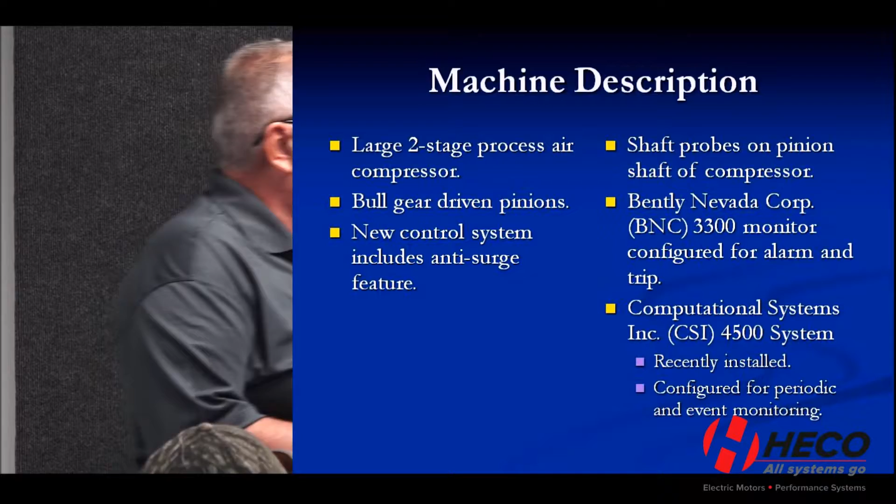They put a new control system on it, and that new control system had a feature that would stop the machine from being able to surge. A surge condition is when you're operating in a pressure and flow area where the machine is not designed to run, and it can cause some fairly violent vibration. What happens is you're trying to compress the air so much and there's no place for it to go that it relieves itself by coming back through. So you actually get a flow reversal through the wheels.

So it goes whoosh, whoosh, and you can hear it sometimes. If you let it go too long, that air doesn't go through the cooler, so it just gets warmer and warmer. The machines grow, clearances are taken up, and you end up destroying a machine. So they put an anti-surge on that says if it started to detect surge, it would automatically pop open a relief valve, let the flow continue through the machine, decreasing the discharge pressure with a pop-off valve.

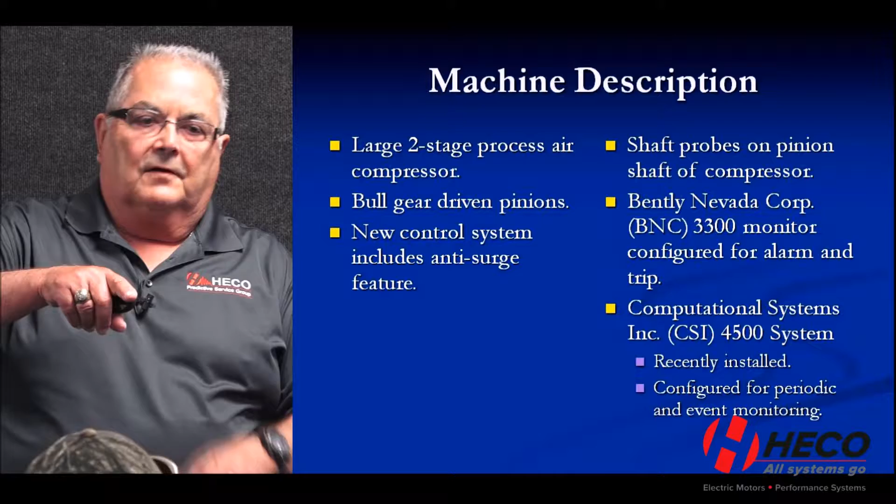They also put a Bently Nevada 3300 series vibration monitor on it, set up for alarm and trip. And piggybacking onto that was a CSI 4500 system, which took the outputs from the Bently system and recorded them. The Bently system is blind, it's a meter, it says vibration is going up, trip. This one recorded frequency spectrum, time waveform, trends, all of that. So it's piggybacked onto the Bently probes.

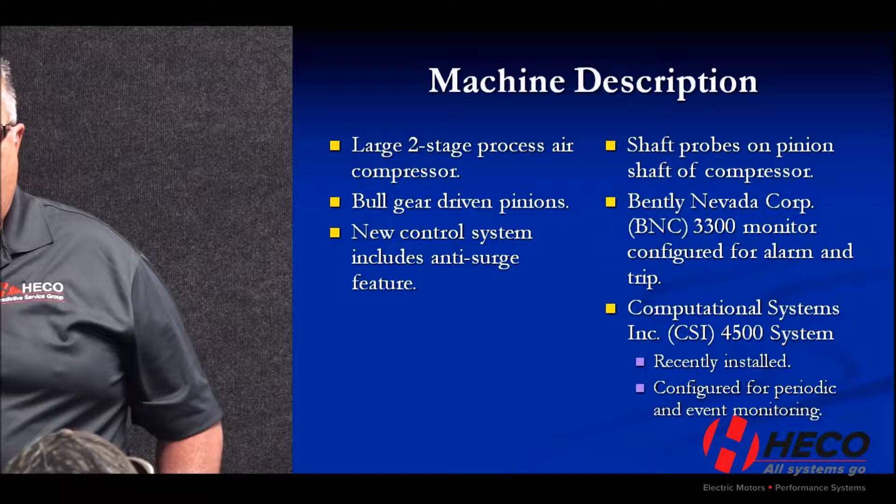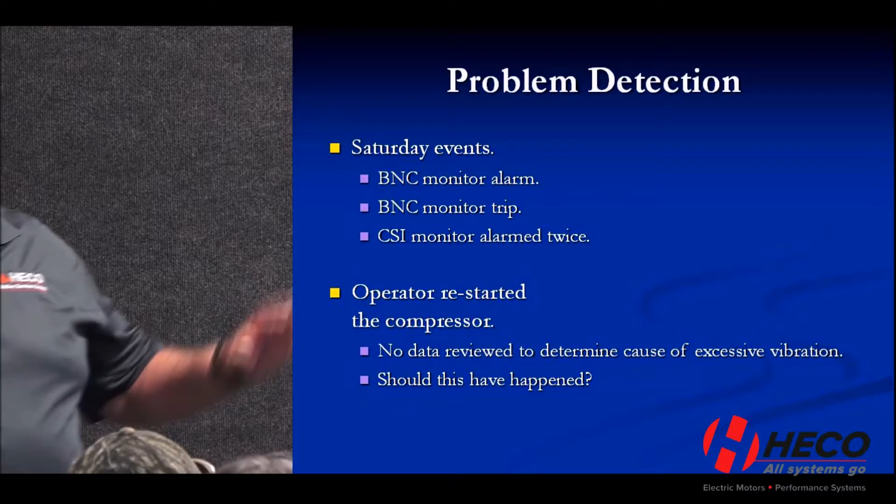Events. On Saturday, the Bently Nevada system alarmed. They have a low alarm and a high alarm. It hit the alarm, then went up and hit the trip. The CSI monitor alarmed also. The operator said, well, it's Saturday, I don't want to call anybody, so he just restarted the machine without reviewing data. Not a good practice. If you have these protection systems and you have a trip, somebody should be looking at it. Otherwise, you collected all this data and it doesn't do anything for you.

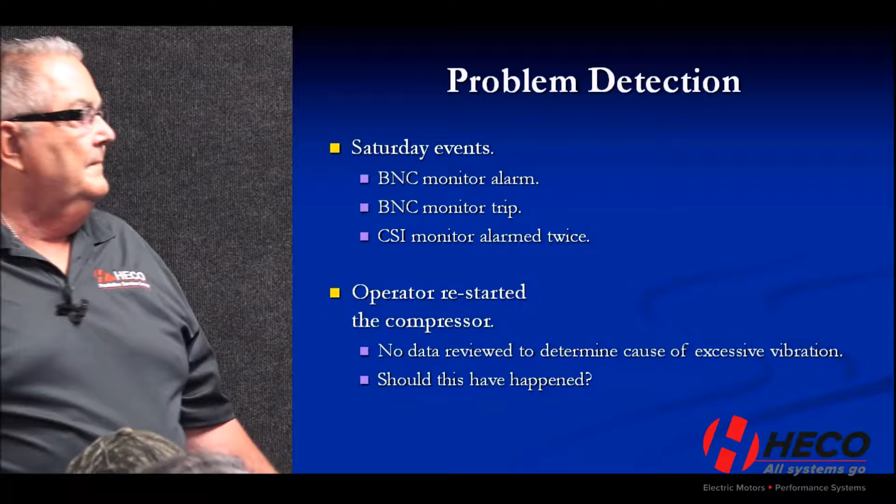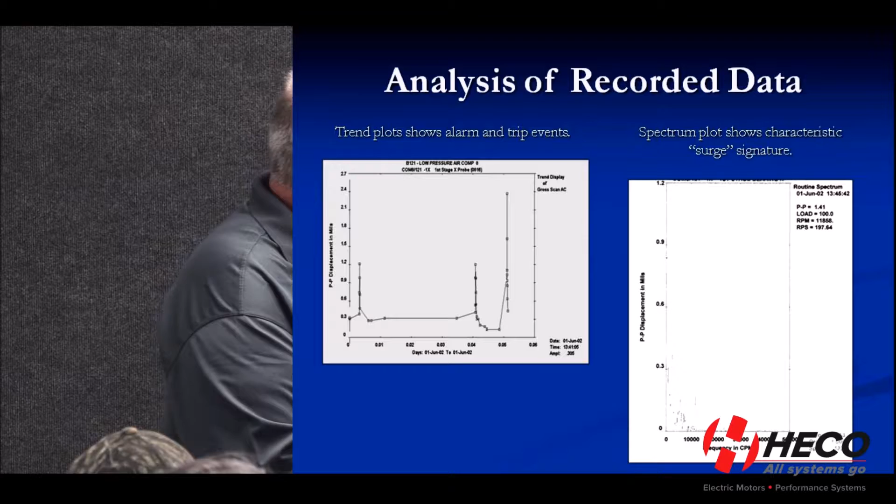Here's a plot of the CSI system showing they were running along. Apparently they had an event back here too. They had an alarm, came back over here, went up and tripped, and came down. In the frequency spectrum, there's a lot of very low frequency stuff that would be symptomatic of a surge condition in a compressor like this. And we said, looks like it had surge. Can't happen. We have an anti-surge system on here. Again, we hear that a lot. No, that's impossible. Well,

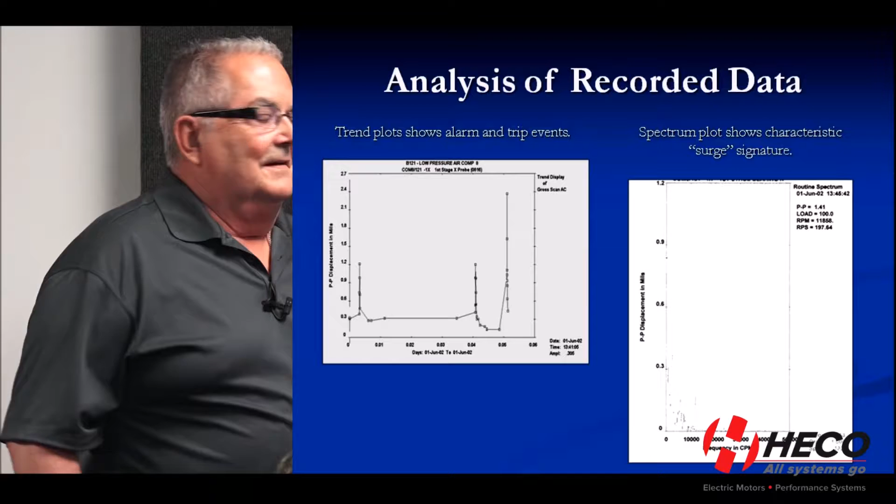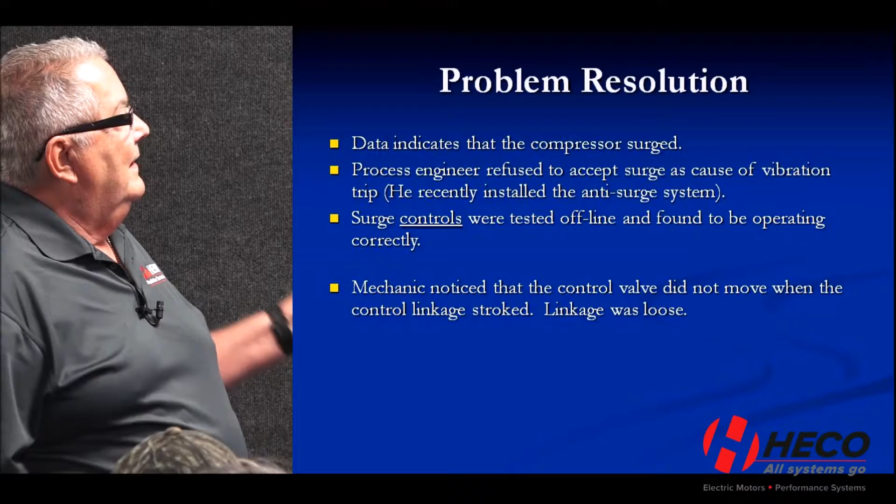the surge system worked, but we wanted to test it. The process engineer said, no, my system works. So we were testing the controls offline by forcing it to simulate a surge. And a mechanic noticed that the control valve linkage was moving, but the valve wasn't moving. The linkage was loose. So the system did what it was supposed to do, it said move this, but the valve never moved. And so they were surging. It was possible.

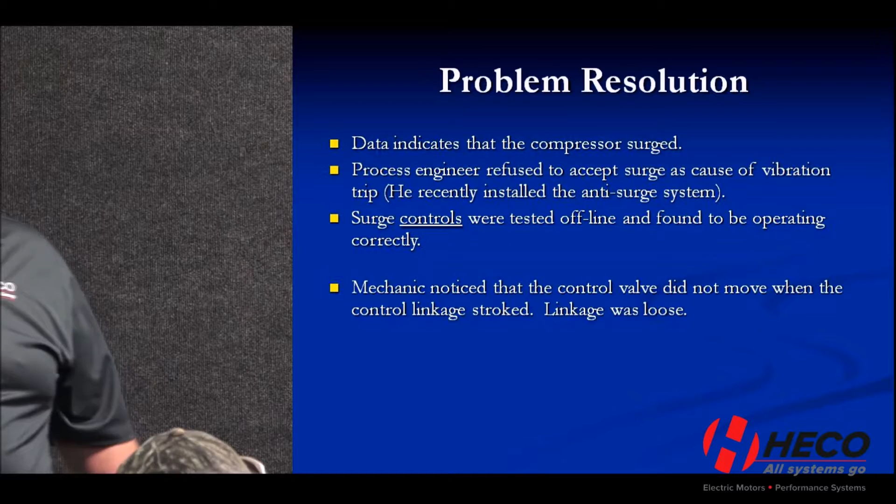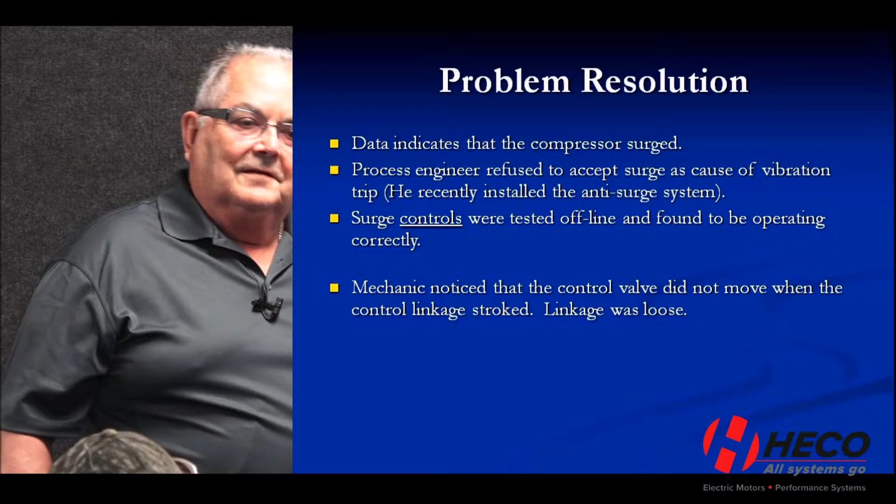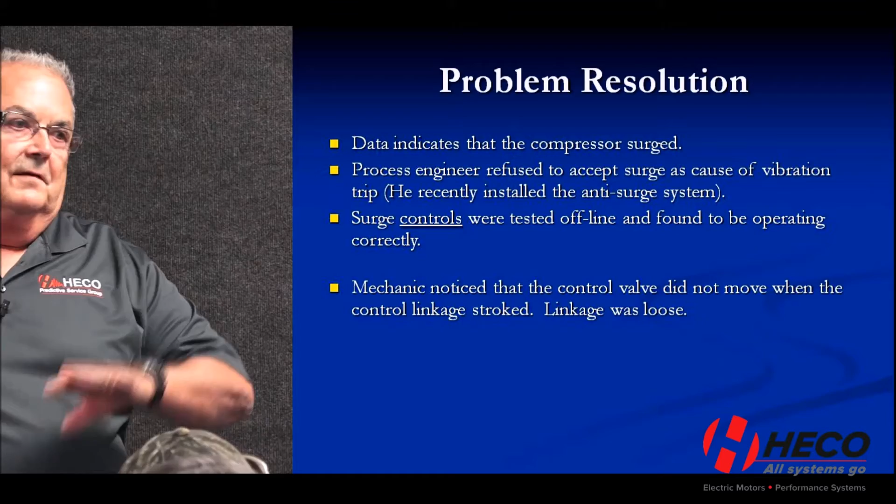Everything worked the way it should have, except the operator really should not have started that machine again. Fortunately it was on a trip, so no damage was done; it wasn't left in surge for any period of time. But when you're adding vibration controls, who's responsible to answer alarms? Operators don't understand vibration. It's just another thing that sets the alarm off that they have to clear. They have to understand what to do. What's step A, B, and C? First alarm, second alarm, who do I call? Who's on duty? That all has to be part of having this system. Otherwise, this instrumentation is going to do nothing for you. Okay? That's it.